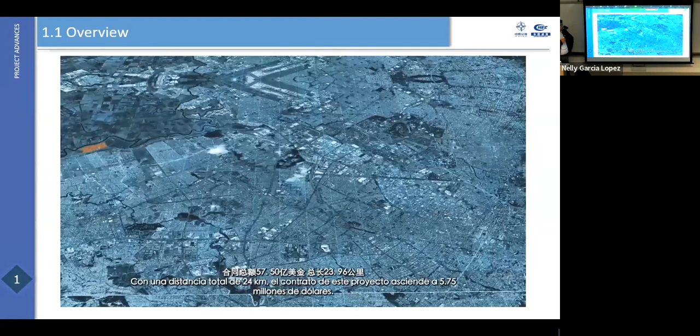Okay, that's the depot. We have 16 stations. We have inside the contract, 2019. That's the joint venture of Metro Line 1.

This is a control center.

This is a ceremony of signing. This is existing city. Well, it's not Bogota. I think that's somewhere else.

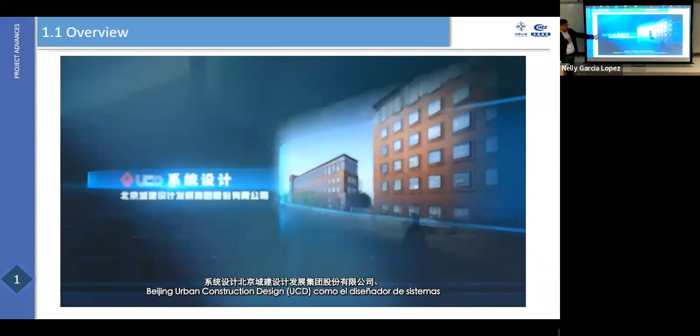Yeah, there's our designer. WSP, there's a Chinese designer for the system. And we have Alstom, who is responsible for the signaling, the train control. This CRRC is about the rolling stock fabricator.

So you can see the map of all the resources we mobilized from the global. So this is the quick sketch for the development of the BIM.

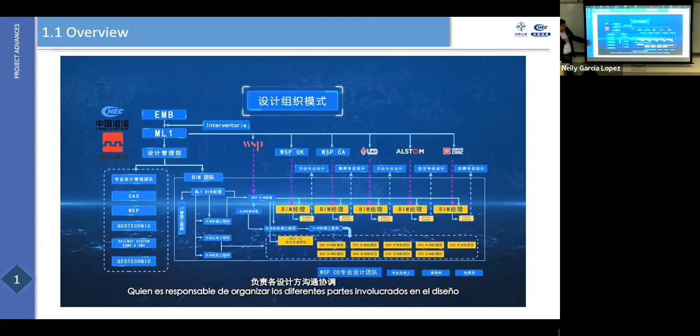This organization, we will do this. We'll give you more detail about these organizations for the designs. Yeah, that's all the BIM team.

This is a quick presentation about the BIM progress. All right, so we can... All right, can we put the sound?

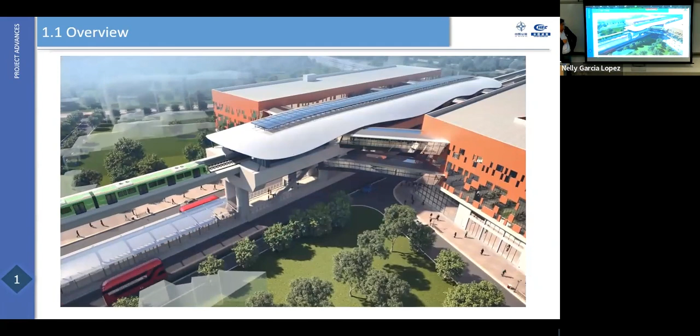That's a short video, all made by BIM. That's a station for 68th Avenue.

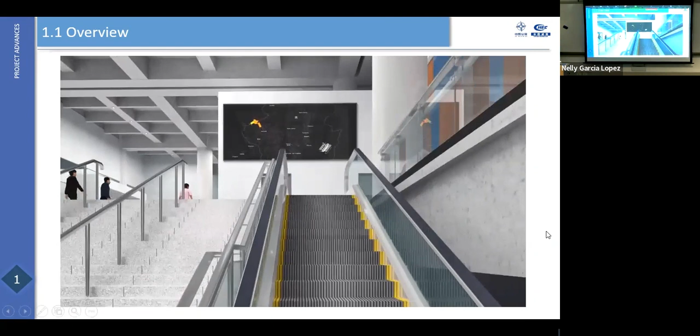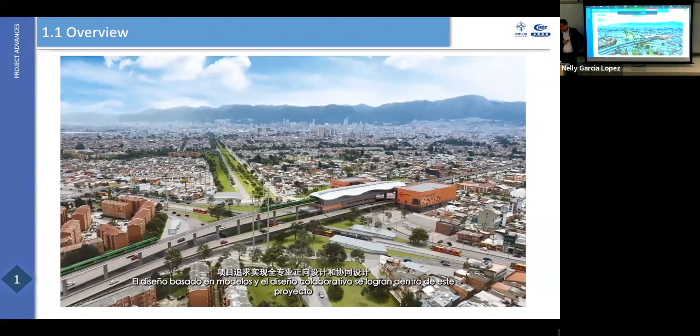This guy also graduated from university.

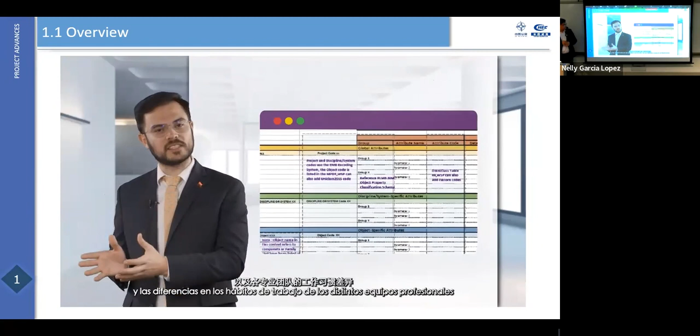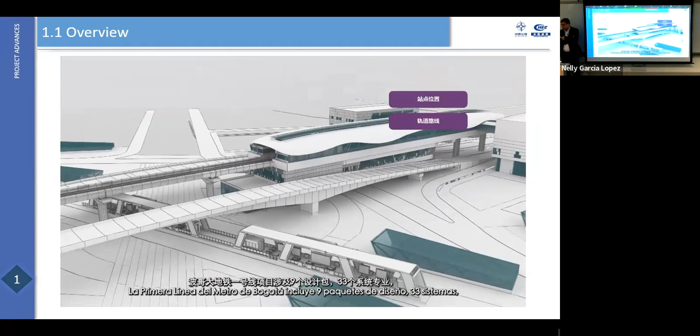The first metro line program incorporates 9 design elements, 33 systems, 270 subsystems, and 597 execution units.

Taking into account the range or discipline and the scope of the project, multiple BIM tools are adopted for the convenience development of each discipline.

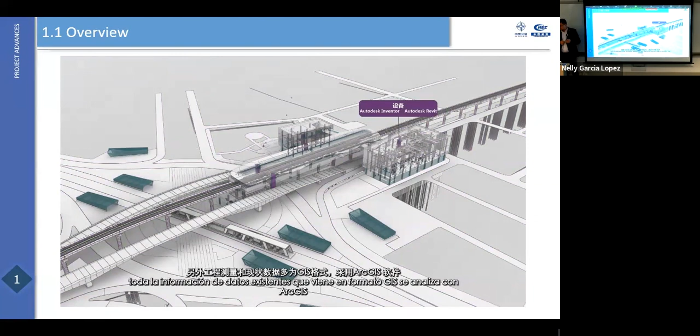For example, Bentley is used for rail track design. Autodesk Civil 3D is used for those municipalities. Revit is used for architectural, and the survey and existing data is in GIS format. ArcGIS is frequently used in this.

This slide, we understand the criticality and importance of the design workflow, and optimization of the design workflow is achieved with the help of BIM and the CDE.

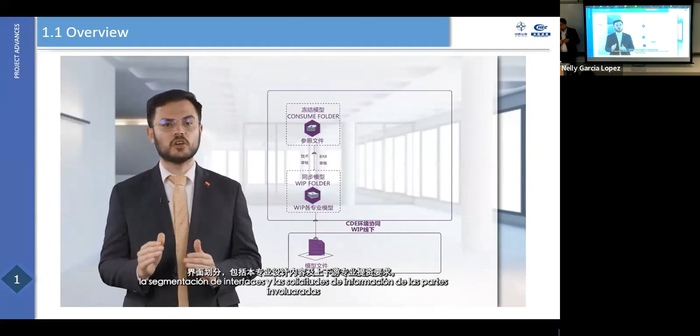A daily basis information exchange has been achieved within the project, hence warranting the necessary information exchanges between various disciplines. The extent of the collaboration lies in the data drawn across different disciplines.

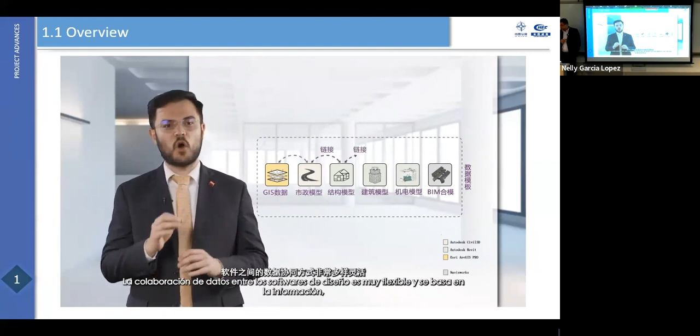The data collaborations between different design software is quite flexible, which is based on the information, frequency, and the data exchange method, such as cloud-based collaboration data, templates, schedule, share parameter table, and the shared families.

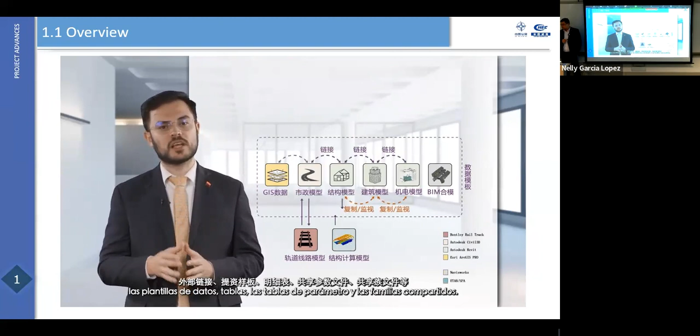The cloud-based configuration is always preferred if possible.

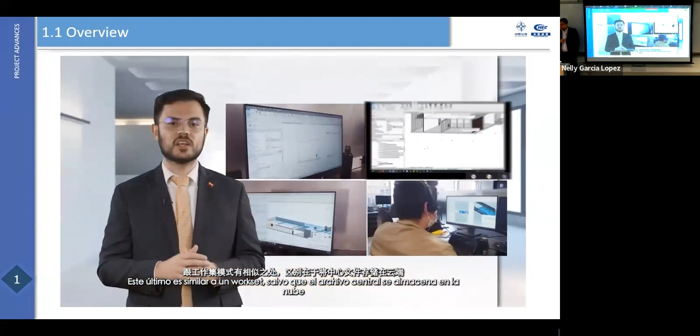Take Revit, for example. The collaboration cloud we achieved via Worksharing, Link and BIM Collaborate Pro. The BIM Collaborate Pro is similar to the Worksharing, except that the central file is stored in the cloud. The above mentioned ensures smooth collaboration across different time zones.

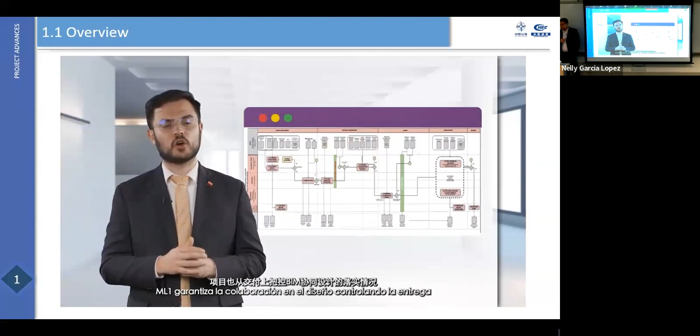Meanwhile, for the warranty, the design collaboration by controlling the delivery emphasized that the design models are the major part of the design delivery. The 2D drawings will only be extracted once the corresponding models are approved first.

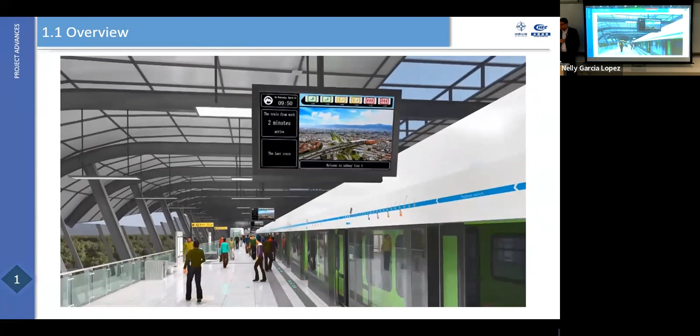It's a feature of the depot.

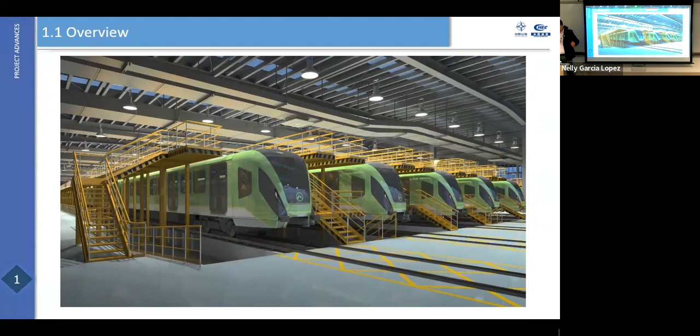Okay, so you got some ideas. So this one, we want, this part, I want to update you about the progress for this project.

This area, I believe you guys visited a few days ago, this the depot, which is far from here. And now we finish, at the early of March, we finish all the ground treatment with the CMC. So at the moment, I think it's quite good in the ground treatment.

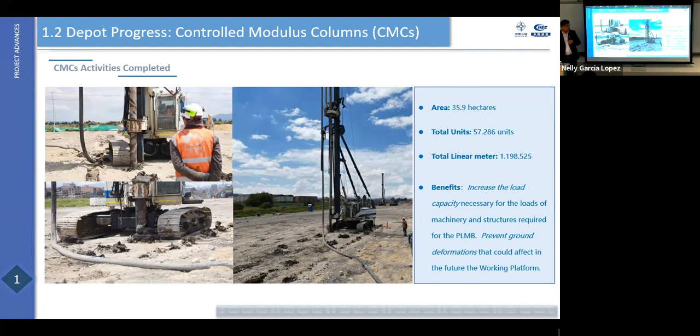We have the monitoring, quite stable. Next one, we're showing the building on top.

We're starting, well, this another video. We're starting the warehouse for the precasting yard for the piles.

We're going to use the precasted concrete cylinder pile, which is pre-tension, and we have pushing machines with the hydraulic hydro power. So you will see them later this year on the city.

So they are responsible for the piling, foundations, for the stations and the viaduct. So it's under preparation. I think this is the quick way to...

So when you were there, was it built? When you visited, was it built? Okay.

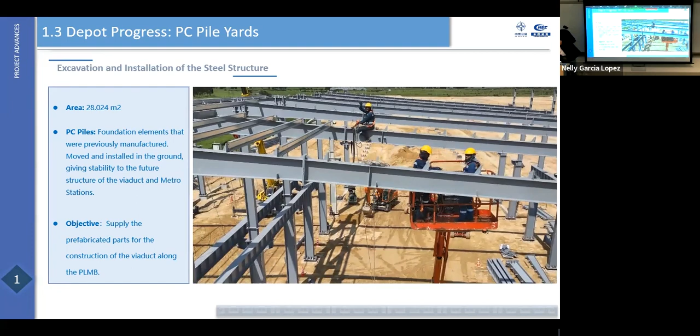This kind of pile has been used in one project, Cartagena Bridges. This is the second time we apply this kind of product in the city. This is also the first plant fabrication line imported from China to produce these kinds of piles. I believe in maybe 4 months, you can have another visit to see how the pile production is running.

The piling could be seen next to the depot. We're starting from there.

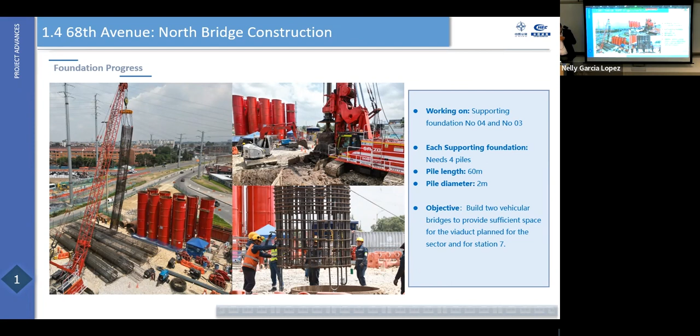Now we come to the main part, the BIM. I'll talk about some basic or fundamental information about BIM. Maybe you already know, so let's discuss what BIM is like.

It is Building Information Modeling. So starting from a no-BIM stage, we come to the BIM stage. We have the database, API, and CAD BIM. We have different levels, 1D, 2D, 3D, and up to 7D.

Let me explain a little bit more. This is the map of the history of development of BIM since 1970. Gradually you can see the map, so we go from 1970 up to 2000, we have different developments. I think it started from CAD, and gradually we moved to different methods, going to BIM. So that's just a brief history.

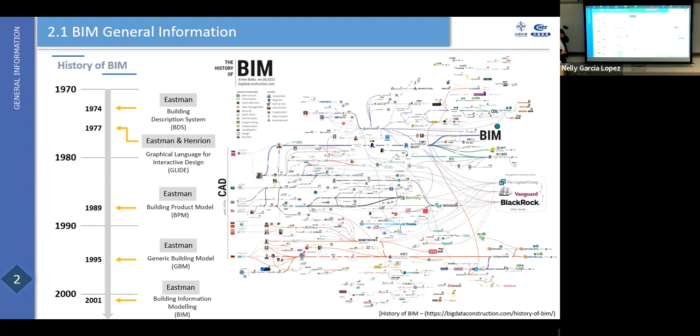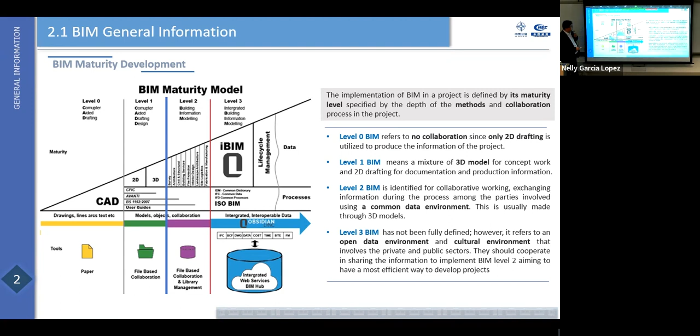That's the sketch you just saw in the video. We have different levels. Usually we've got 3D for the design, and later we build into the BIM concept, integrated at level 3, building information, so integration. Also 3D for the design here, and later for construction procurement, we go further, using the design information to get a time schedule, quantity, cost, and the final one would be performance.

I think it's for project management. You see there's a lot of list items listed there. I don't want to take more time on this. So this is the project information.

Like I said, why I put the railway project here is I want to show you how complicated it is. The superstructure, the viaduct, is 24 kilometers, and the design speed is 80 but operation speed is 42.

We have GoA4, meaning no driver. Everything operates normally, you don't see any drivers on the train. Everything is controlled by the signaling and the supervision control system, meaning we won't have any manual operation.

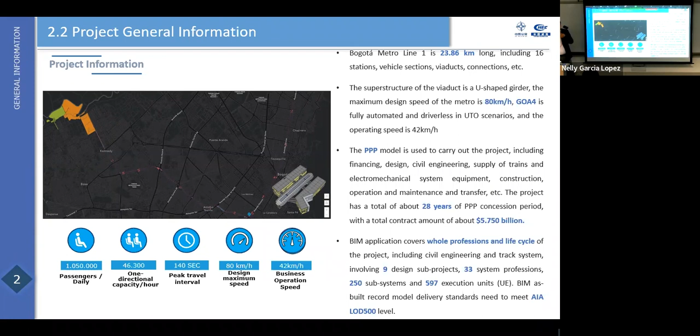This is the contractual requirement the BIM uses, which comes from the design. This is a planning stage, design stage, construction stage, and operation stage. So you can see the BIM requirement application would be from the very beginning. We have to plan for the BIM structures, organizations, and executions for the design, construction, and operation. It's not like some kind of BIM users who just use BIM to do the 3D and hand it over to construction for their information.

But this project, we have to fully use the BIM technology. That means at the planning and design stages, we must talk to the operator, because we have to know what kind of information is needed. Don't forget that information is the core of the BIM technology. So what kind of information does the operator need for the final operation? We have to build the model from the beginning with this information, leaving room for future inserts, whether in later design, construction, or procurement. We have to plan from the very beginning with a clear demand from the end users, that's the operator.

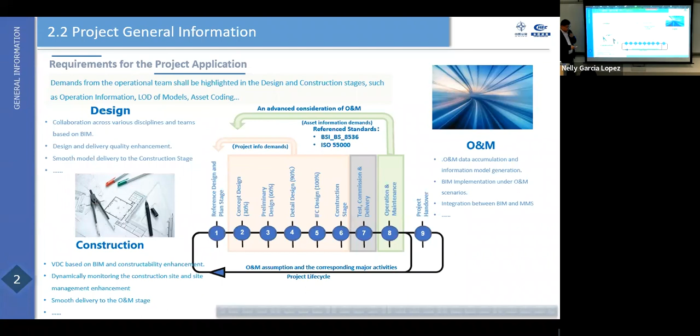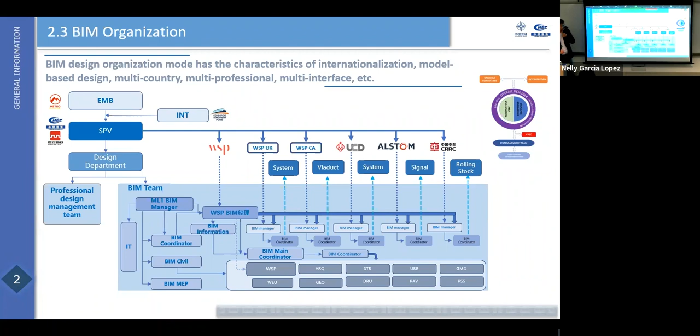We have a lot of challenges in coordination and communication, because sometimes we speak different languages, and different designers use different technical tools. For example, the software: we have Canada, Colombia, and UK, and they use different software to build. For example, we use Revit, but WSP UK says no, I want to use Bentley. So that's also a challenge.

It takes us a long time to do this converting, to merge all the models together. For example, in Colombia we finish a model and go home, and at that moment the Canada and UK teams start working on the model we just finished. So when they're finished, they update it. This is not on the same time zone, so it's a problem.

So that means there's also a delivery challenge. Every company has different standards for deliveries. We have to make it uniform, only one standard for delivery in the BIM. So we have to talk to each team to make sure they agree on the same principles and protocols in communication and deliveries. This is the challenge of BIM for the project.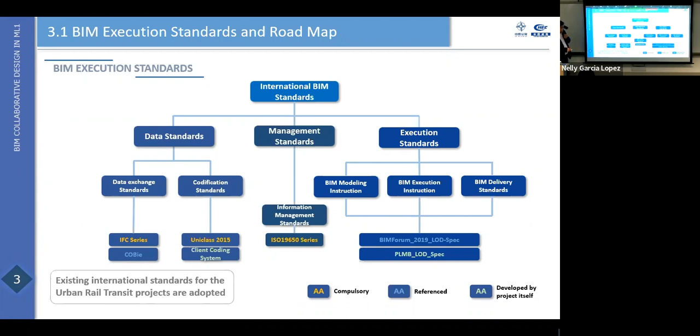This is a short video, but I want to show the larger one so we can see the list of disciplines. We had civil, rail, track, elevated superstructures, power supply, communication, signaling, integration, monitoring, structural, and roads and landscaping. This allows for the infrastructure, the BRT station, and underground pipe network. All disciplines have to be done, and the design has to be done in BIM.

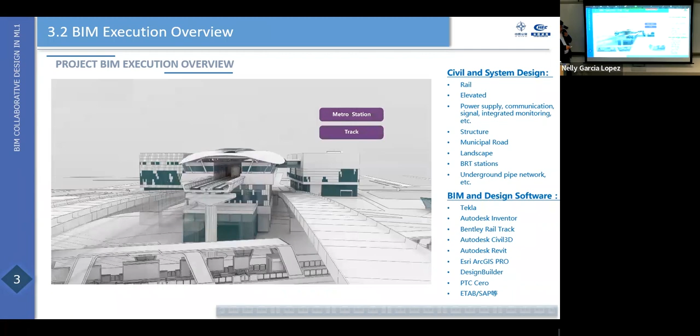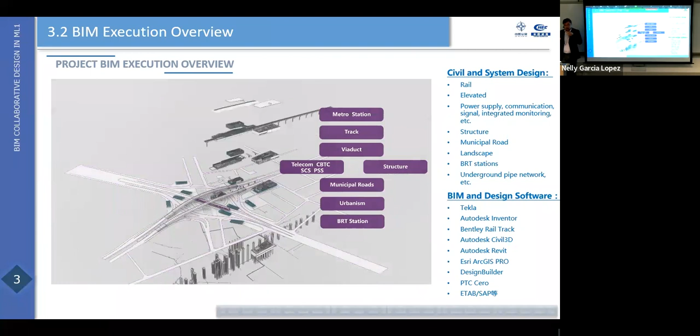This is the metro station. We took one metro station as an example. This is the track system. This is the whole elevated viaduct. The viaduct is where we designed the segments, which we lift up and put together. It's topographic. So the road system, the architectural design, structural, all the MEP.

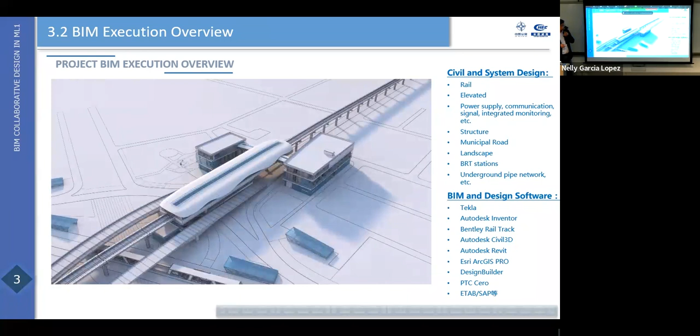This is a video to show how the BIM is growing. All of this comes from the real design, not just a video.

To get this work done, we have to communicate between discipline and discipline. For example, we call it the gauge, or the space for the beam for the rolling stock running. So we have to talk with the track discipline, coordinating the track discipline and the rolling stock itself to make sure the train running at different speeds is not hitting the edge of the structure.

This seems easy but is quite complicated. We have to run simulations for the car running at different speeds to see how it behaves on the curve, since the train may climb a little bit. So we make sure the train won't hit the edge of the structure, and we make sure we leave the gap there.

Also the top flange for the superstructure is for evacuation. We make this wide so that if there's a breakdown, everybody can get out and walk on both sides of the beam. We also have the lighting system for evacuation at night.

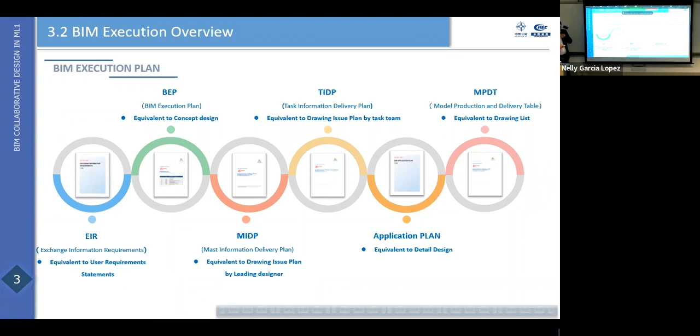This part is also quite important—the content for the BIM execution plan. We have about 6 parts, and also several annexes, to complete all the information requested by all the parties. That's the contents of the execution plan.

This is quite important for the BIM delivery workflow. Maybe it's too small to see, so we can share this after the presentation. We have to go through the model development stage and the internal coordination stage, and this part here is for sharing.

So there's review for the different disciplines, BIM model review, and then after that, submission, with different parties involved. From the beginning—creating the BIM model—to delivery, we have to go through these procedures with all related parties involved. There's daily communication, and we have model reviews in between, to make sure all disciplines are clear and modify their work to accommodate requests from other disciplines. So you can see this information is quite important—it's about the model, not just the model itself.

So it's what we call the CDE, the common data environment. The CDE is quite important. This is kind of that data—how to say that—it's like a brain. So all the information is going to be exchanged in the CDE system.

And we got our document control systems, and this is the design department, and we're dealing with the submission, internal submission. But for the designers, you can see the designer list here. And WSP, as we call the design contractor, is the general designer responsible for all the review and integration interfaces management. So we treat them as the design part.

So they will have the communication through SharePoint, Teams, and BIM 360. Now BIM 360 is becoming another name. Okay, so what's the use? On the SharePoint, we have different flow chart workflows for review between these designs. For example, I got a design done, I put it on SharePoint, I initiate a workflow.

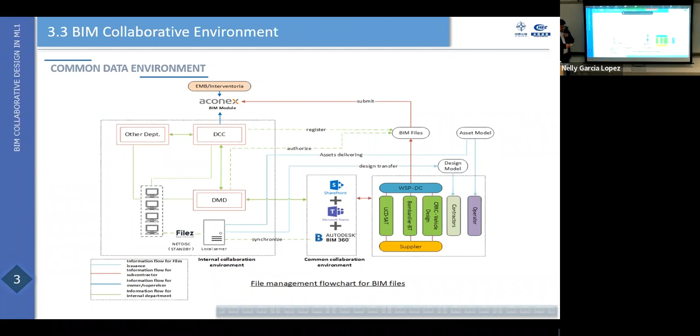Okay, that's the design, collaborative design workflow. So we would say this kind of collaborative flow is centralized with the CDE as well.

So we've got different disciplines' models here, and we put like a track with the multiple municipal models, and they're going to link to what's called the structural models together, architectural models, and finally go for review by the M&E, that's mechanical and electrical. So finally we have all the information or comments sent to the CDE, and finally we get a federated model fixed for delivery.

Okay, there's another one: we've got a WIP, the work-in-progress folder, with every single designer. So they create their work-in-progress models but save them in there, and give access to us so we can have a look at what the model progress is. And the relevant disciplines can get access to see whether they need to send requests or questions.

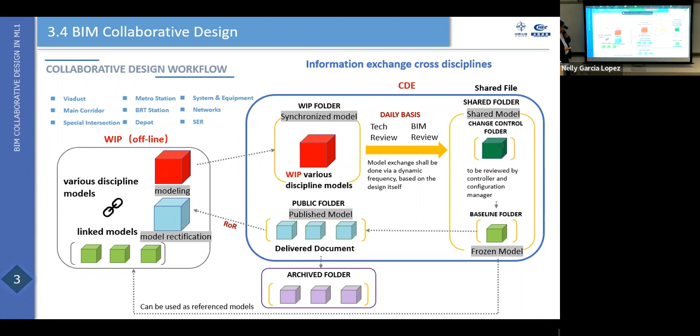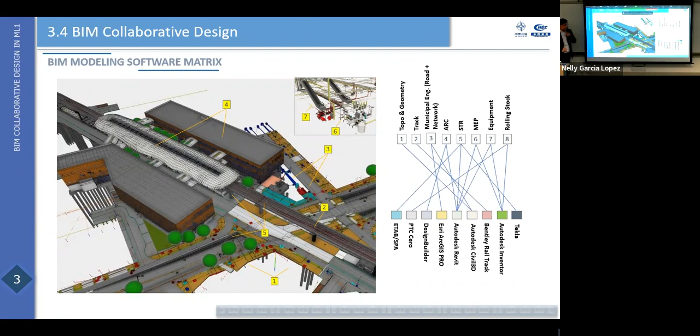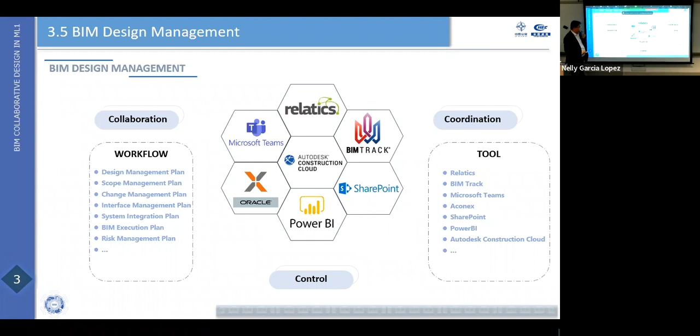We have this one, Relatics, for the interface management. And this one, I already introduced. The BIM 360 now is becoming what we call ACC, Autodesk Construction Cloud. This one replaced BIM 360 at the moment. And BIM Track is also a tool to track the changes on the BIM. So with this software, we're able to make sure the collaboration is done.

The BIM model technology management means from work in progress, we go through change control with information requested from the reviewer, checker, and other disciplines. After that, in 360, the checker identifies which drawing or model contains changes the element should be active. So the change control team comes up and validates the information and the impact of the change. And if it's approved, we go to another process where the change control team validates, and the major quantity of the element should be compiled without affecting project development. Finally, the model changes, the drawing changes.

We have the element updated, and the baseline is updated. So the baseline is quite important.

For example, we have a lot of elements for the systems, like cameras attached to the ceiling. That means the architect has to be informed. So in this case, we must push the architect design as early as possible to consider all the requirements from the other disciplines. For example, they have to give me the location of the camera on the ceiling so the architect could consider this, and also the space of this classroom, right? They have to define it. But if the safety guys come and say, hey, this is not enough for evacuation from an emergency, they have to change it.

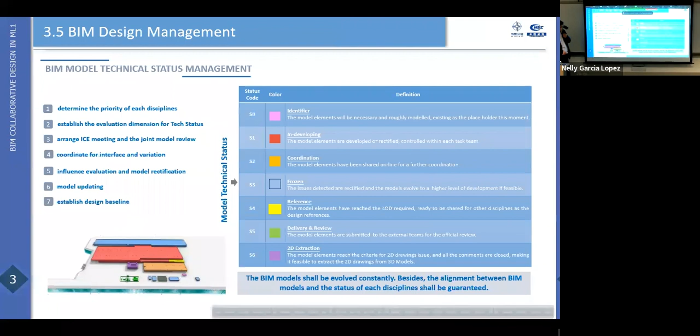Okay, so this is the technical status management. We use a different color code to show the status of the model, what status it's in: identified or in developing, coordination, frozen, references, delivery review, and 2D extraction. That's quite useful. It's easy to identify what the model is and where the procedures and the model are.

The interface management, I said, is like a secondary function we use for the BIM, because in the BIM we have a lot of, I don't know how many, I think it's more than 1,000 interfaces between one discipline and another. So lately it's quite hard to identify the interfaces from drawing to drawing, model to model. So lately we try our best to use the BIM model to identify and mark up the interface from one discipline to the other. When the interface is closed, we change the color back to normal.

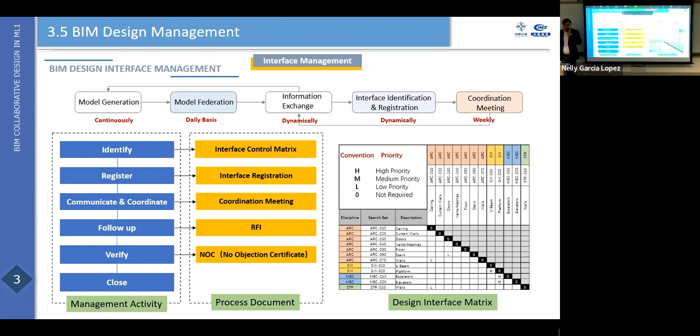That's easier for the designer reviewer to know when they review the model. If this interface has a different color, we have an interface open, so we have to send a question to the two disciplines: what are you going to do? Okay, so this is also another interface management software. I believe that is the one, Relatics.

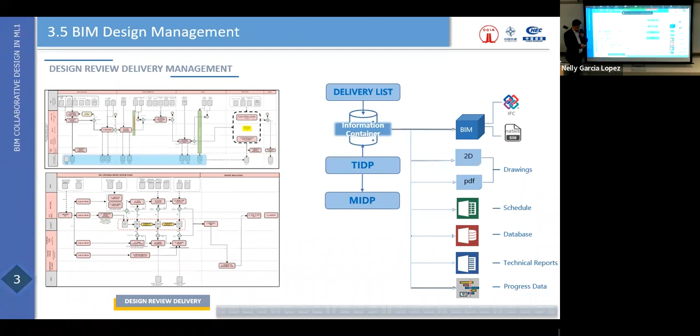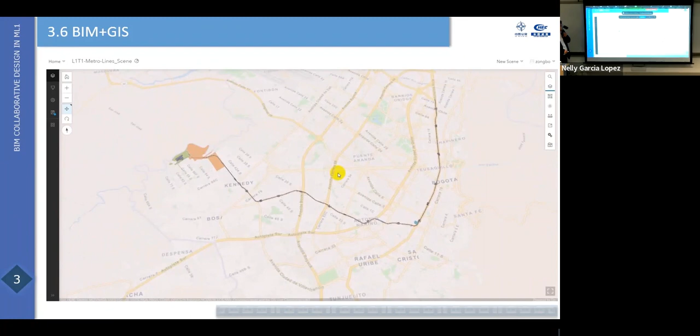All right, so here I want to introduce BIM plus GIS. That's a BIM model with the GIS, the Geographic Information System. This is much faster. So we got all the information on the GIS basis.

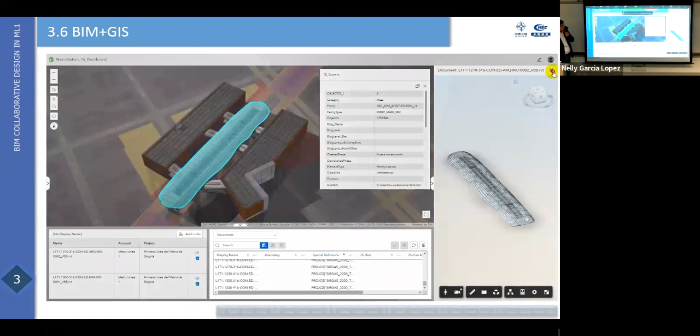Okay, this is the GIS technology assisting the linear engineering project like the metro. So we got GIS information here, we put our models on, then we can know the surroundings of the models, catch the GIS information. That's a video here showing. So we can catch more information than just a model alone.

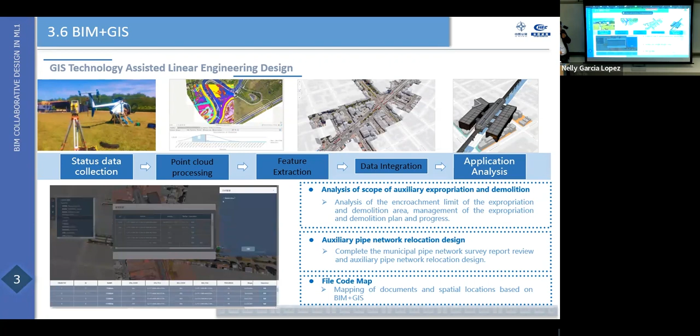All right, so this part we're gonna introduce the execution progress. At the moment, we're under the procedures going from 90% to 100% of the design for the metro. So this is the full map of the metro.

Yeah, for example, that's the station. This is the navigation from that's metro station 3.

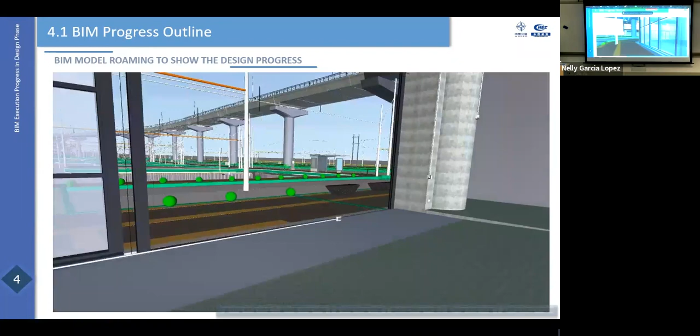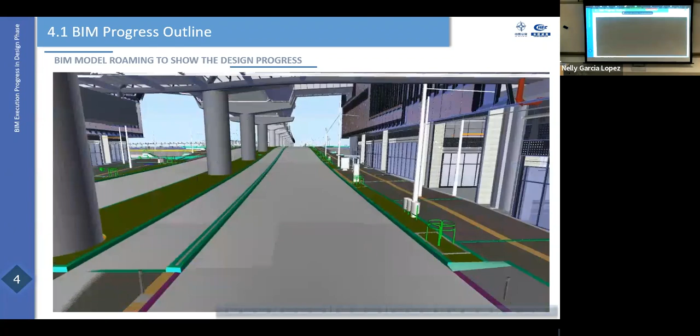Right. Yes, you can see within the model we can find the drawing easily. When we're doing some development now, we want to put a model with GIS on the whole line, and we put all the drawing design reports linked to every single element. So that's what we're doing now.

So to gather the engineer on site who's doing the construction, they want to find the drawing. They don't need to call the office to find the drawings. We give the model and maybe put it on the phone or iPad. They can easily click on that, the drawing pops up, they can see it. So this work is under development.

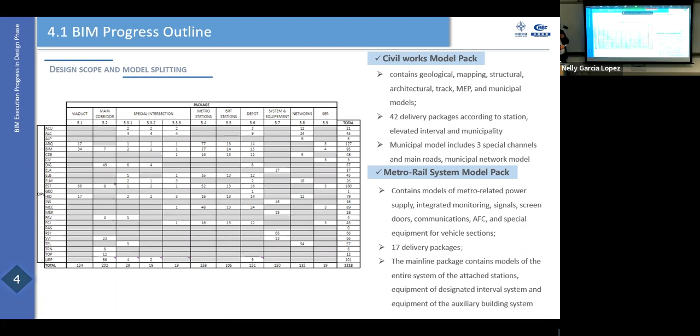So all this breakdown matches the 2D drawings and the report we normally call the deliverable list. Okay, that's the general progress we've made now.

You can see most of them are almost 100%. Some of them are 90 or almost 90. Metro station is a little bit behind because it is not main design. Metro station is quite a complicated building. We have to take care of the train, take care of the passengers, take care of all the systems, the control system.

Like the door, and the entrance, the access, the ticketing, the power supplies, all the MEPs. It's quite a complicated building. I believe it's more complicated than residential. So that's why we put this one a little bit late to the next stage.

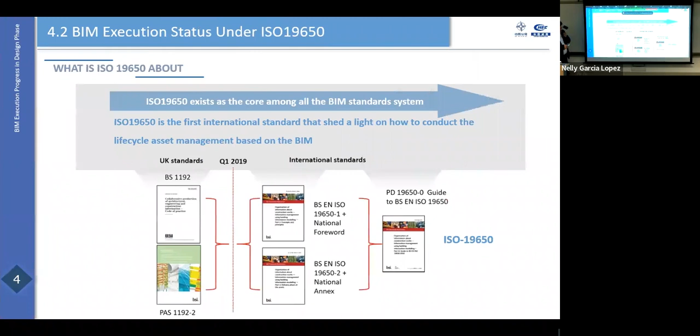Okay, so this is about the progress. I'll run a little bit faster. This is the standard we're using for this project, and the BIM team focuses on these standards when they're checking or reviewing the BIM teams, the BIM models.

Okay, so this is the main focus on BIM management. We have to check the inputs, like the employer's information requirements, BIM execution plan, and some specifications.

And the next one is the design process. We have to check the model and the coordinations, make sure the model is appropriately created between the engineer and the modelers. And the next one is about quality assurance, we have to go through the QA/QC check procedures, which could automatically come up from the software itself. And the last one is the output.

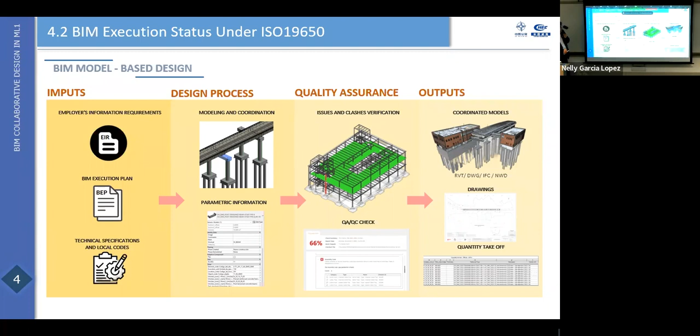So when we want to know the status of the model, we can easily find out what the status is, which columns are open. We can find out the reason and push to complete.

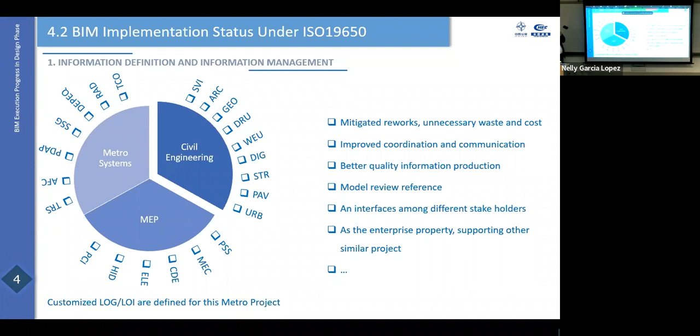So this one, I will talk about the LOD and LOI and LOG. This is quite critical. The LOI is level of information—we have to define it per discipline, so which discipline needs which information to be attached to the design model.

This is not a single party's job. We have to confirm—we proposed, but we have to confirm with all the disciplines that they agree with this kind of information, with the LOD 350 at the end for the 100% design. It took us almost one year to reach agreement with all the designers.

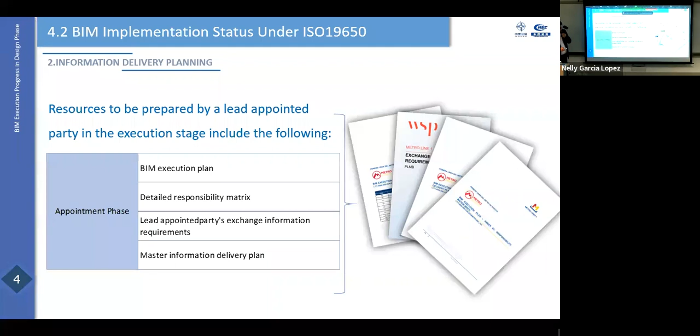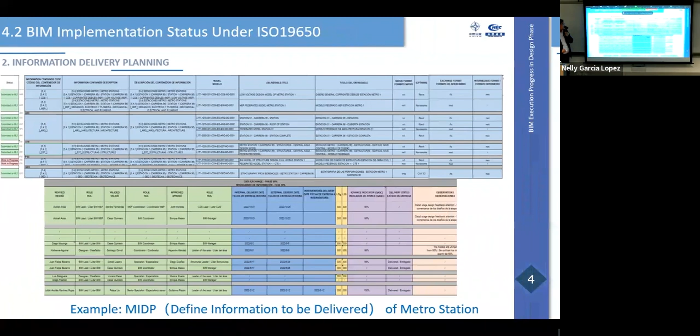So this is the information delivery planning—we have it all registered. I don't want to go deeper, but it's quite useful for checking and reviewing the progress. And also we have the open data.

We use the buildingSMART open BIM concept. The first video we prepared was for buildingSMART—I think for awards, but unfortunately we didn't get it last year. We'll try one more time this year.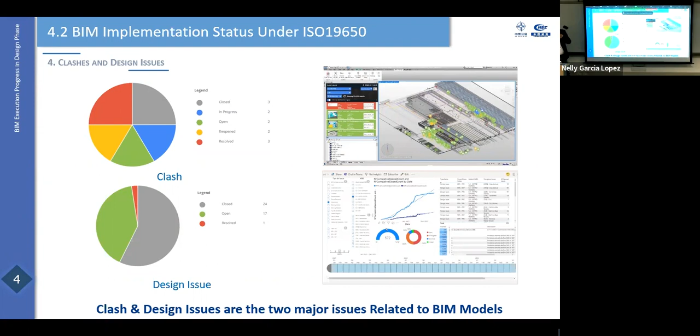This is a bit of planning—we are going to make some guidelines for the BIM during the execution of this project. We learned a lot, we got more practices. I think by the end of this year we're going to get this published.

Okay, so the next part—you have to cut it short because there's another class here at 5. Okay, but if you want, 5 minutes close, fine. Okay, sorry about that.

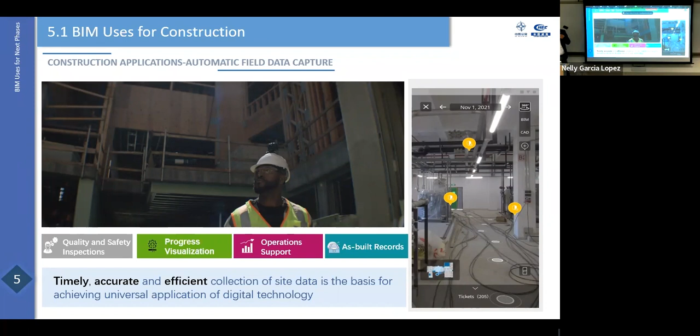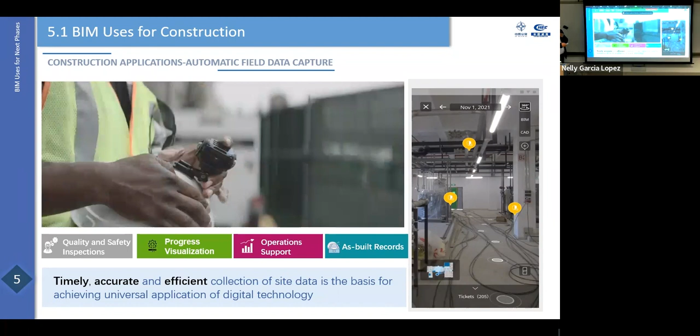So for the next phases, we're going into the construction phase. Now in the planning, we will build another system, like a smart platform for construction. The BIM technology is quite an incentive—this kind of technology with a camera on the helmet to detect progress and scan the progress. This information could be transferred to the data center to monitor and get the real progress. I have to move faster, okay?

This is a construction application: production, storage, transportation, installation—all this information has to be collected on site and stored in the data center. We call it 'build twice'—that means we build physically on site, but we have a simulation or real-time model in the BIM.

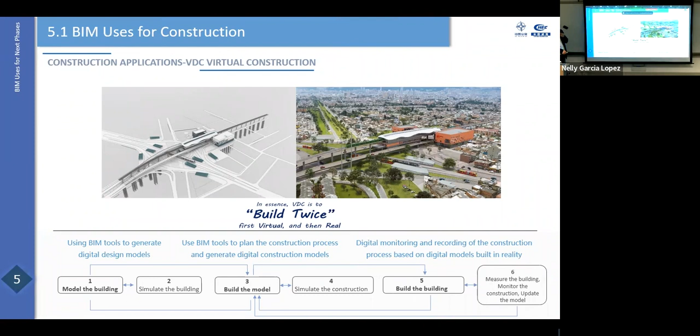This is another task—time, locations, progress. For the operational stage, we're going to have a new platform with BIM combined with another operation platform, so we can manage assets, all the information of repair of the machines.

All right, so that's all. Sorry about that, this is quite long. Yeah, thank you so much.

Personally, I felt very happy when you showed us that video. It's quite short for very a lot of content. We always see the walkthroughs of your renders, and we could tell that it wasn't a render—it's not a render, guys. I really appreciated that, and thank you so much for sharing it so openly with us. Thank you very much. Anytime. Maybe we can come later, in a few months—we've got more to present. Thank you very much. Anything? Again, so sorry.

No, sorry, that's my fault, I have to go, okay. Okay, no problem. So I would say—you have questions? Some questions, maybe if we can get them, send to Ines so we can answer later. And also I think you're welcome to—very interesting, okay, thank you so much. Connected with it—next time you can come to my office, we'll get more detail.